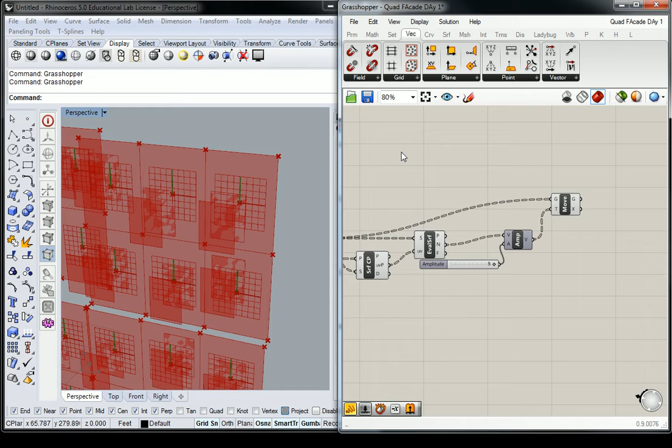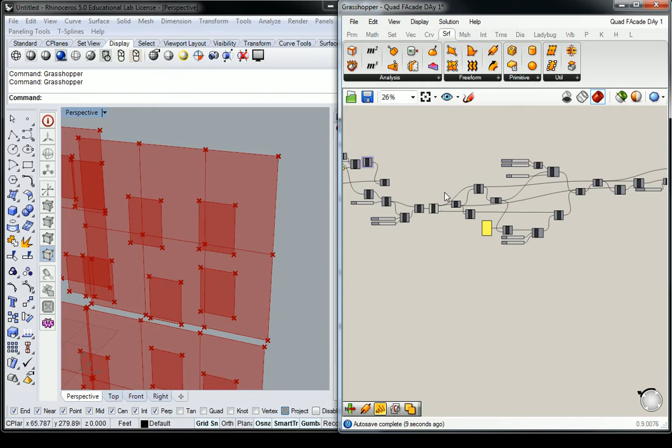So it's as simple as using surface deconstruct brep, and you can take your moved panel here, and let me turn that off so it's not confusing. Turn other old geometry off as well. And then go back to the original panels here. That would be these deconstruct breps. So you're going to take your deconstruct brep edges and you're going to use those.

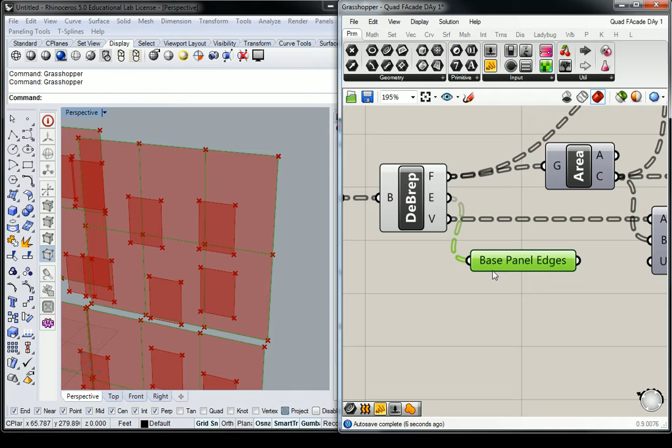So I'm going to create a wireless one for this since it's so far away. So I'm going to go to params and curves. I'll plug this in and I'll name it base panel edges. Make a copy, connect it, and then wireless it. So now I can drag this one all the way over here and work on two sets of curves at the same time. So I have my new edges for the moved and reduced size, and then I have my base panel edges here.

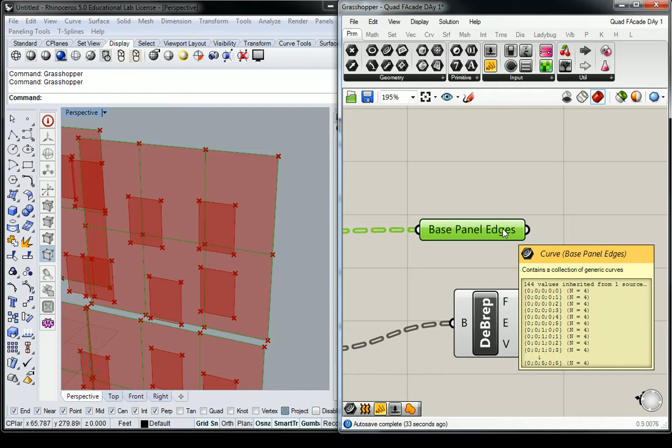So here's the really nifty thing, is that we can list item the sets of edges that correspond to one another to very simply loft them together. And that's part of it. Actually, one of the things I want to do as well is the vertices. I need the vertices as well. So let me do that again. I'm going to grab points. I'm going to do vertices here and name it. I'm going to call it base panel corners.

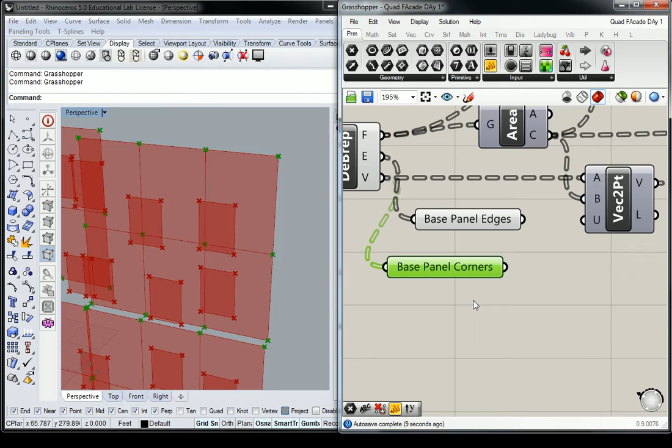Sorry, I'm moving really fast on this one, guys. You'll have the video to get caught up. So wire display hidden. And I'll move this over here. So now I've got the bottom two of each because I don't really need the faces anymore. So this is what it looks like. We want to loft them together.

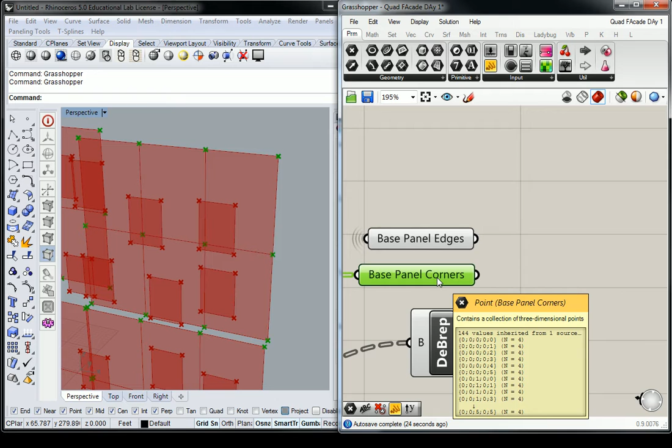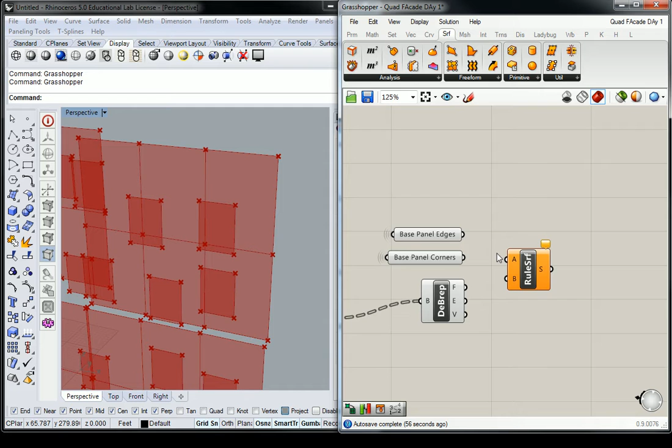So I need to grab each of the edges that I want to loft. In fact, what I want to try is lofting it without having to use list item. I haven't done this yet, so I'm going to see if I can do that now. I'm going to go to surface and freeform, and because these edges are coming out in lists, I have two lists that I'm going to loft together. I'm going to try using ruled surface. And it's going to take two different lists of curves.

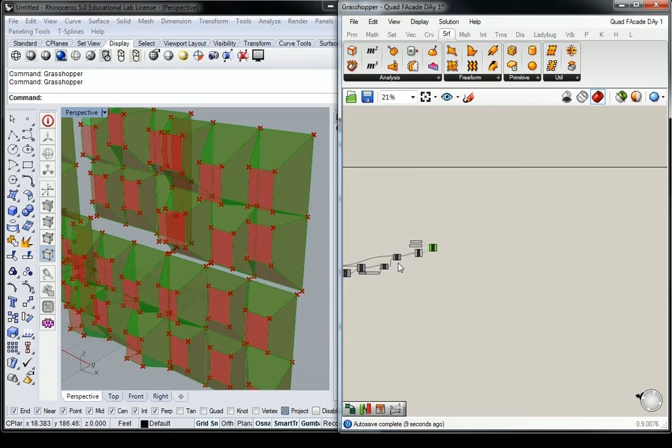So I'm going to try using the base panel edges and the new reconstructed panel edges. And I'll loft them together like that. Pretty cool, right? Super nifty. I can go all the way back to my sliders. I can move it in and out like this. I can go back to these sliders and change the jitter to move them around like this.

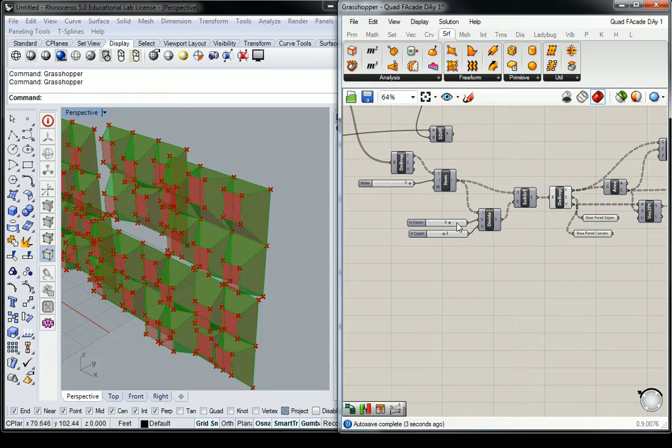I can even change my subdivisions if I wanted to. See, now it's 4, that's 3. So basically anything that we created as a numerical value can be changed now, fully parametrically. And the cool thing at this point is I can just start layering things on top of it, giving it more and more detail, and it's fully parametric.

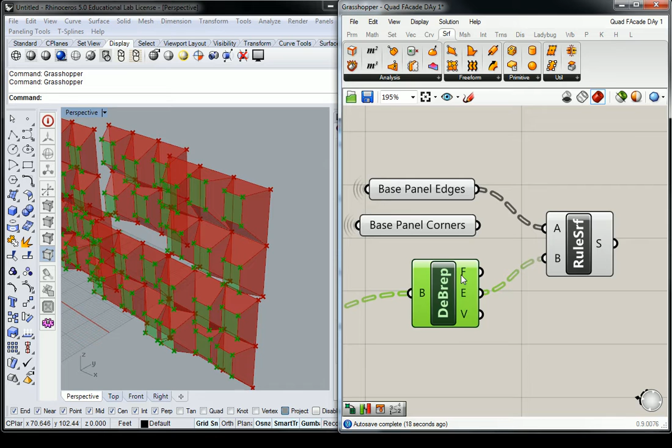So if I wanted to go so far as to frame the edges, that's why I have these, I can essentially use a pipe, and I can take my new face panel and grab my edges, whoops, sorry, Control Z, grab my edges here and just set a radius for it, say 0 to 0.55, actually let me make it 2 because I'm going to change it to inches using math.

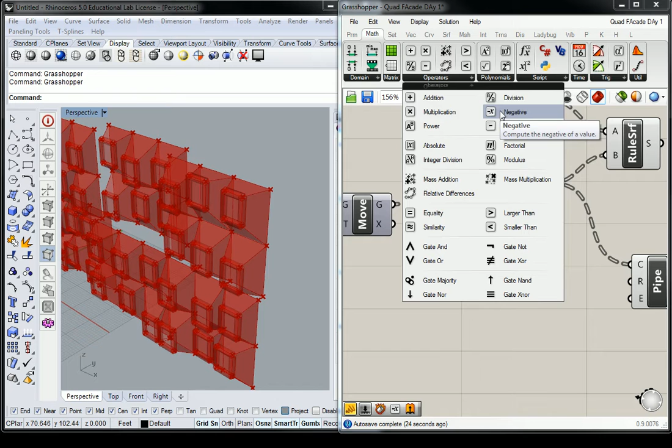Sorry guys, I know I lost you, don't even try and catch up right now, okay? Just pay attention to what's happening. So math operators, I'm going to divide this, and panel, make that 12. So this is my standard conversion. Make that the radius. So make it up to like 2 inches. So you can see that now there's a frame around it. See that?

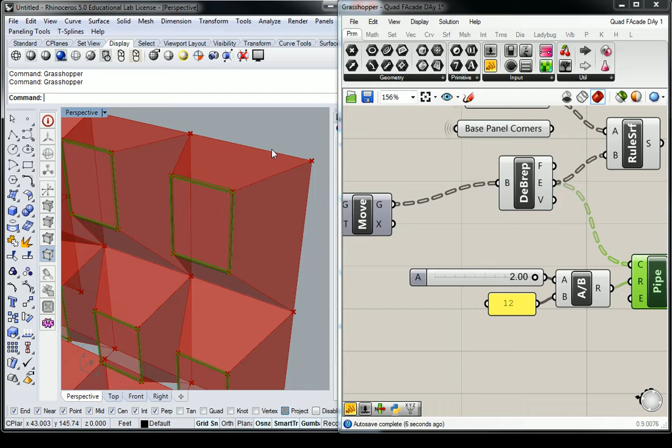Pretty nifty. The other thing I can do as well, let me move this down here, is insert another pipe for the edges around my truncated volumes. So I can use a line, set up another set of curves that stretch from here to here, because right now I don't have a curve there. I have a ruled surface, I have my front surface, and I have my back surfaces and edges.

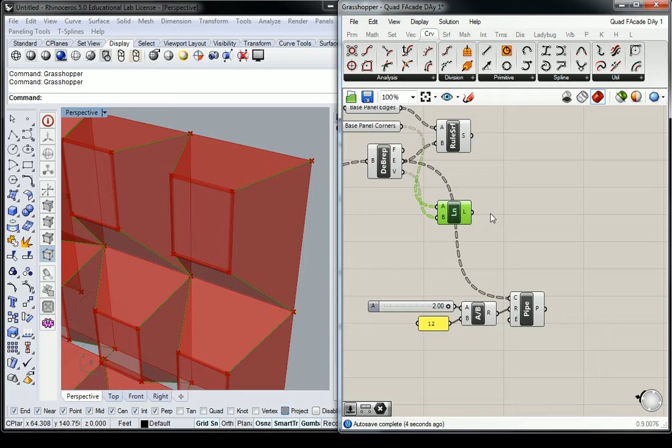So I'm going to go to curve and line between 2 points. And I'm going to create a line from my base panel corners to my new panel corners. That's that line right there. Which, coincidentally, I can just shift connect to the pipe. And now I have a pipe that goes around the entire frame.

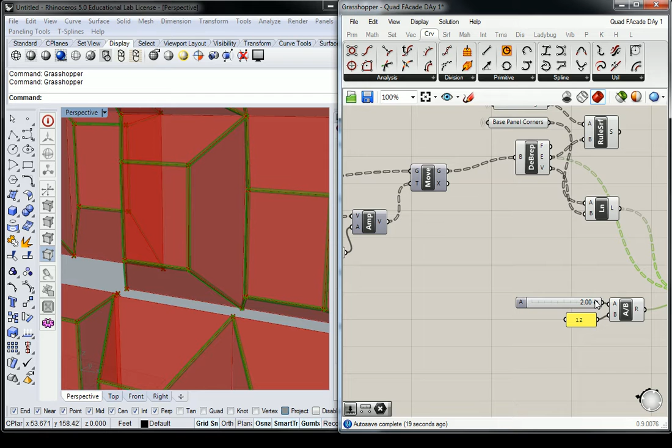Okay, so not only do I have a new panel in a new location, which in my original definition I resized dynamically, but I also have the ability to change the pipe thickness. I can go back and change where it is, how far it extrudes. All the things that I just showed you, I can change fully parametrically. And if you get down to the point of actually generating hardware for this kind of thing, then you can do that as well. Okay?

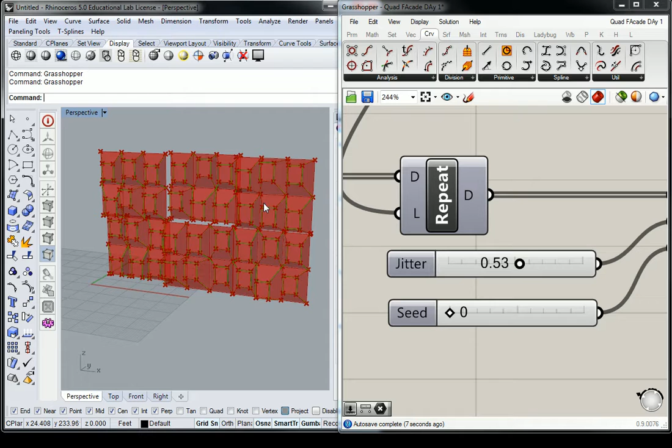Questions? None. Okay. So I just ran through a bunch of things really, really fast. They happen to all be right here. So I'm going to come around, make sure that you're all caught up, answer any questions that you might have on this and other things, and then you're free to go at that point.